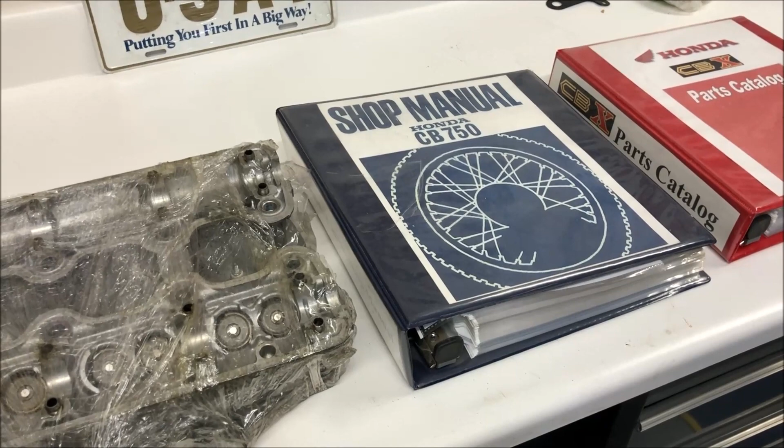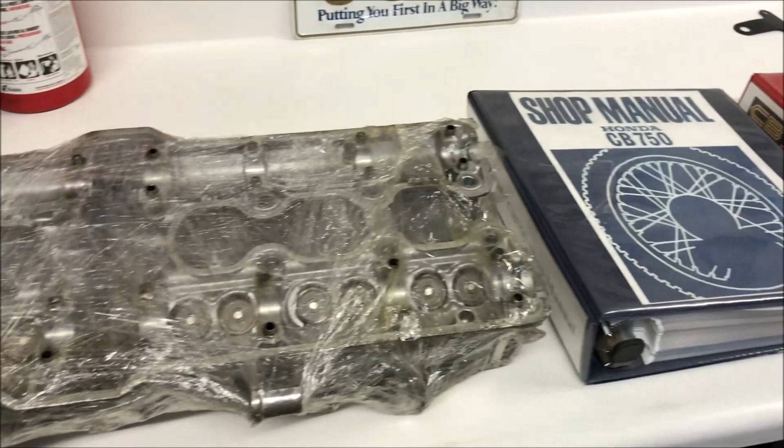And also I want to go over the CBX head that I just got back from the machine shop and unwrap that and go over it.

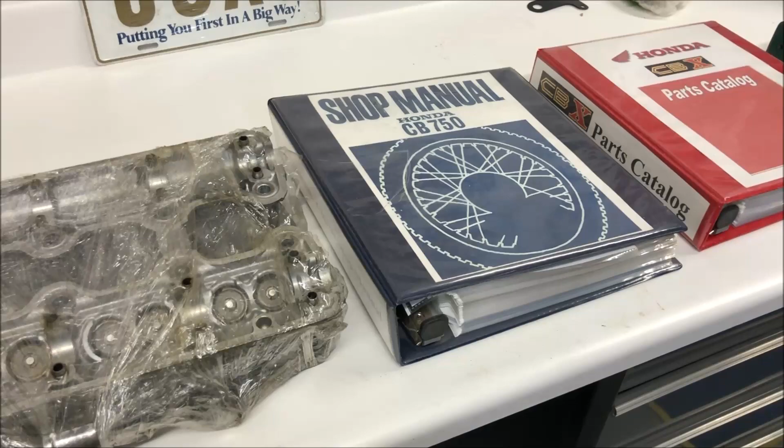By the way, somebody asked me in one of the comments where the name Digital Pizza came from, and it actually stems back to 1995. I was reading the newspaper about a website called Digital Banana, and I just thought that was very cool. And I love pizza, so I grabbed Digital Pizza. Back then, you had to have your own website if you wanted to post your own pictures for eBay, so I started posting pictures on eBay of some of the bikes I was working on. And all of a sudden it kind of stuck. So everybody over the years knows me by that name. That was 20 years ago, and it's kind of stuck. So anyway, that's where the name came from.

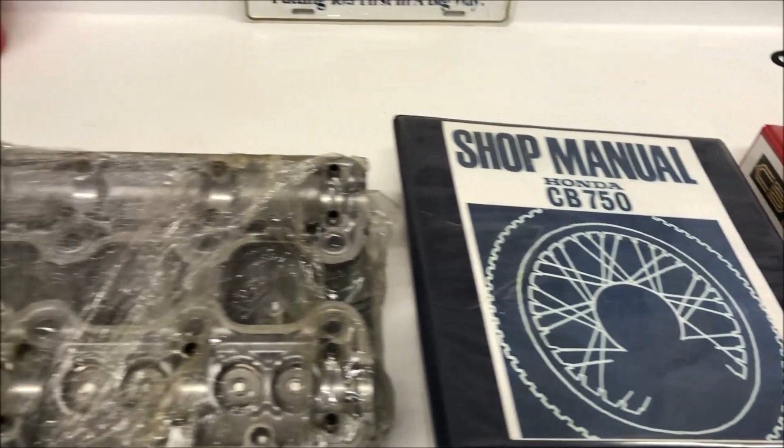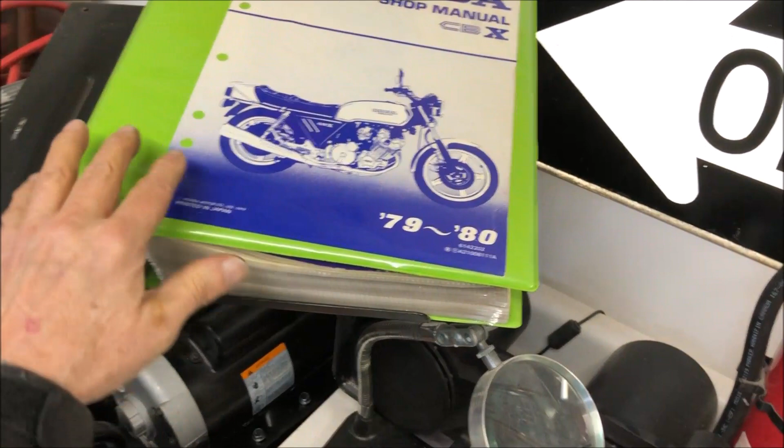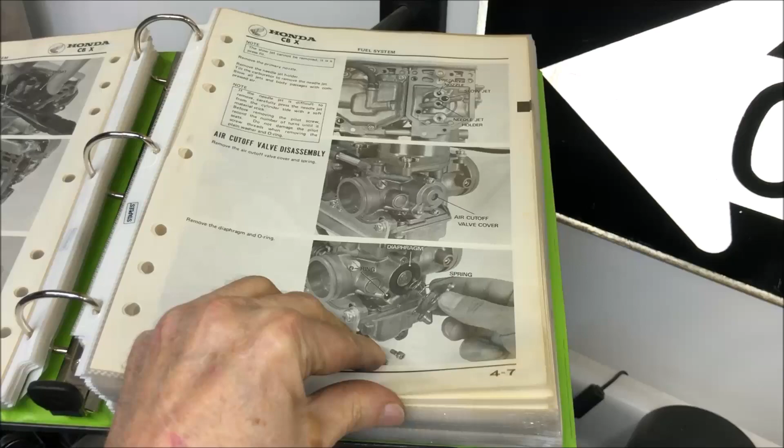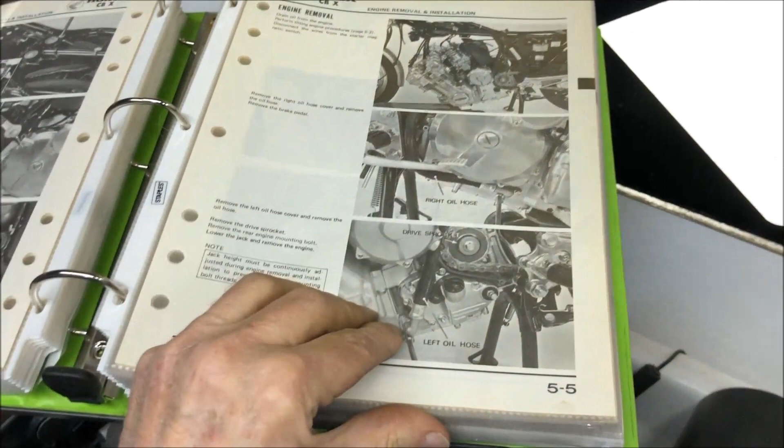As far as the shop manuals are concerned, I just think they're extremely important. On my bench here, I've even got a thing where I can have the shop manual open while I'm working on the bike. This particular one is for a CBX, and I tell you what, I refer to these constantly. These are factory shop manuals, and pretty much they cover everything on the bike, including parts diagrams, loaded with pictures on how to do certain things, just about everything about the bike.

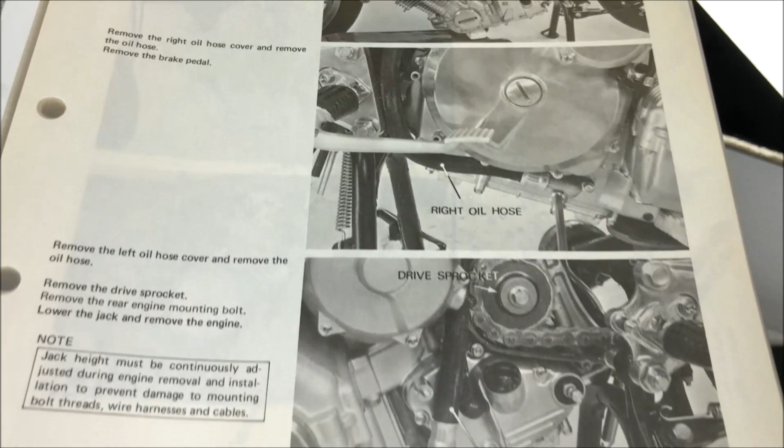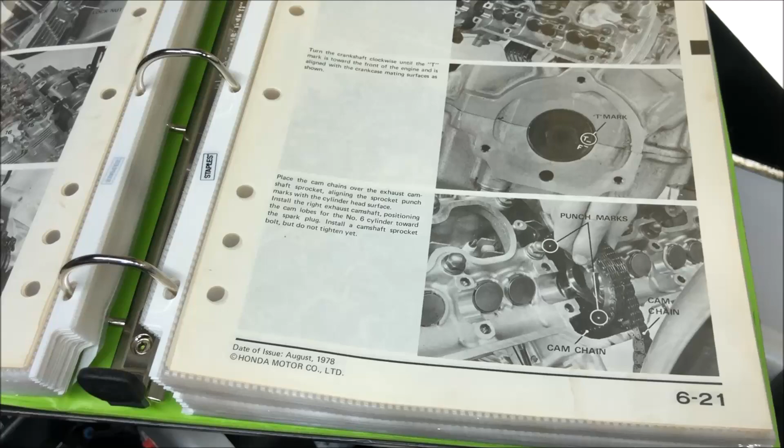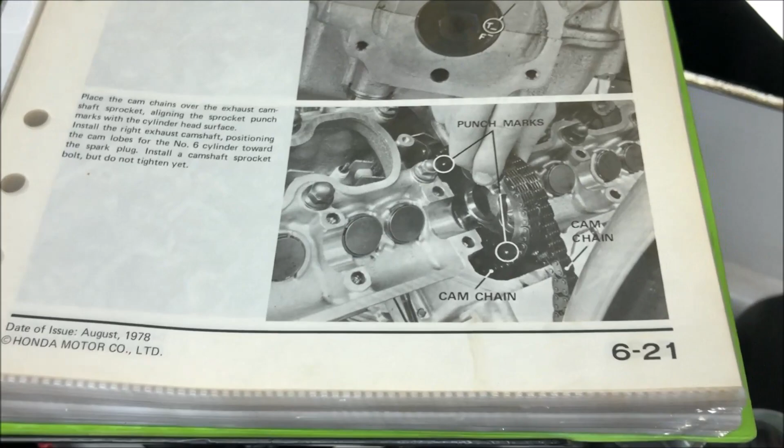These are what the mechanics used in the service department, and still do to this day. I know a lot of this is online, but there's nothing like when you're in the middle of working on a bike - you don't really want to go to your phone or an iPad and look it up online. You just have it right here at your fingertips. I've taken all the pages and put them in these protectors, so if you get any grease on it, you're not ruining the page - you can just wipe it right off.

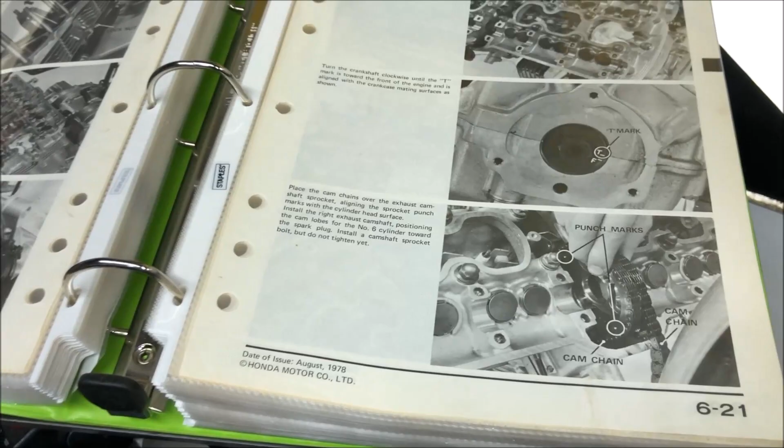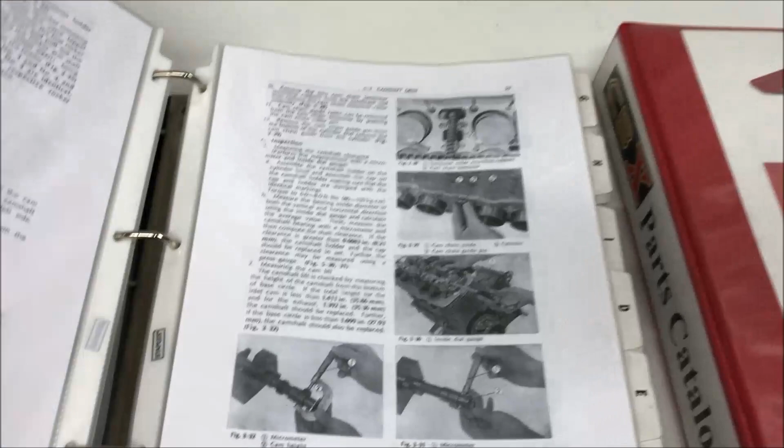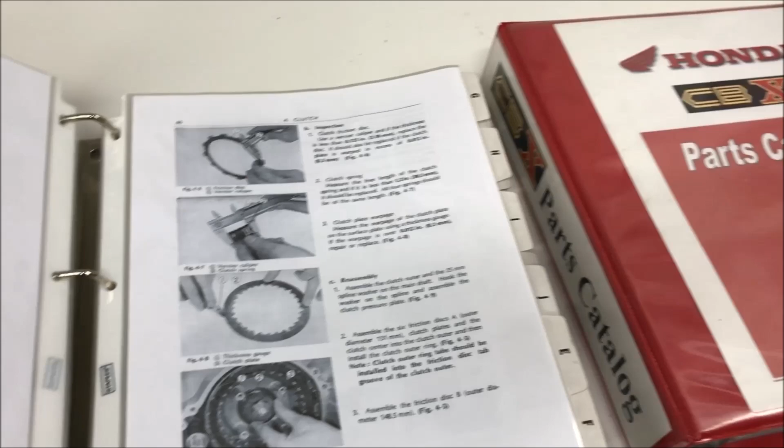So I've kind of put these catalogs together for myself, and like I said, I use them constantly. Here's one for the 750 - same thing, picture after picture, technique after technique, everything. They just cover everything. Some of these manuals can cost quite a bit, like on eBay, but they're worth their weight in gold in my opinion.

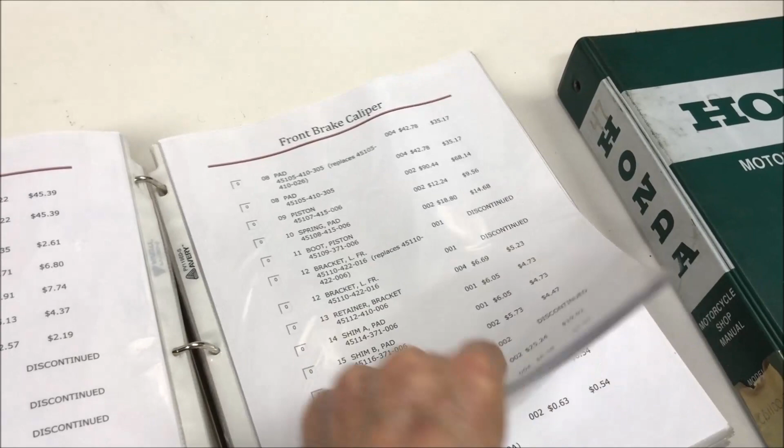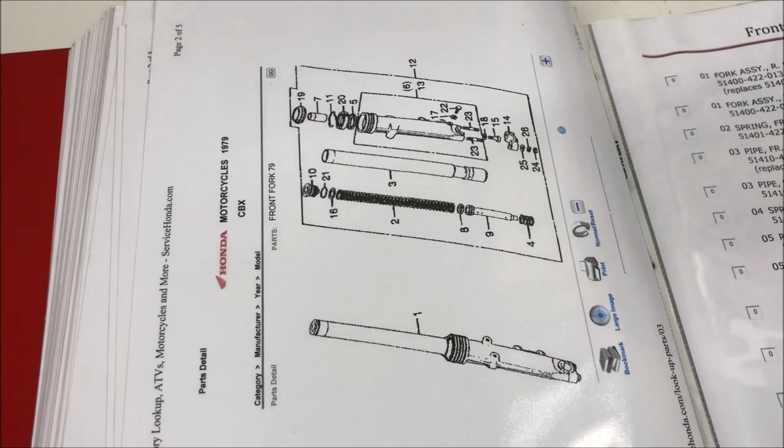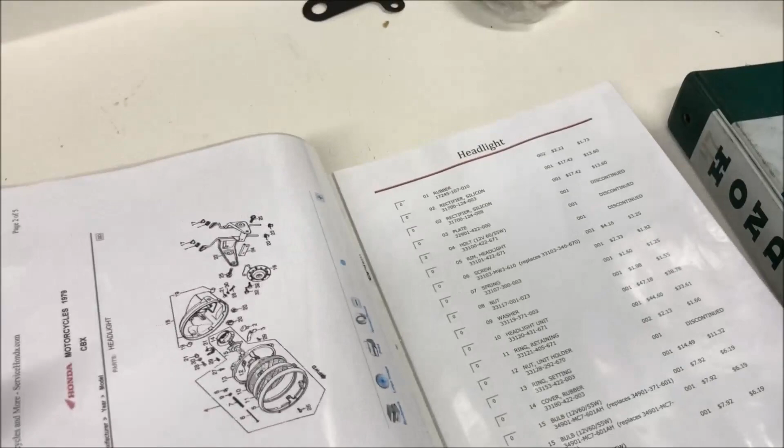A little effort putting them together in your own binder is well worth it. Then there are a lot of parts catalogs for each of the bikes. This particular one is for the CBX, and it's got all the part numbers, the microfiche diagrams with all the part numbers on there. Every time I do a job, I go through page by page and write down the part numbers. I've actually got most of those together now, and then I hand them over to the Honda dealer and find out what's still available. A lot of the nuts and bolts and everything are still available, which is nice when you're doing a full restoration - like a Concours type restoration, it's nice to have a lot of these brand new nuts and bolts. So that's on the CBX.

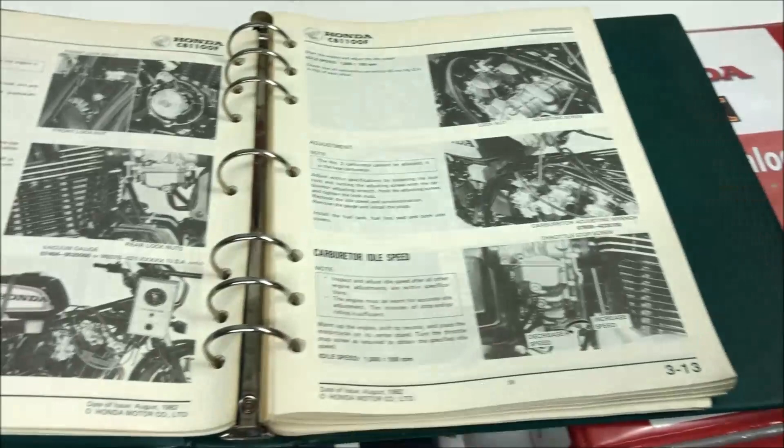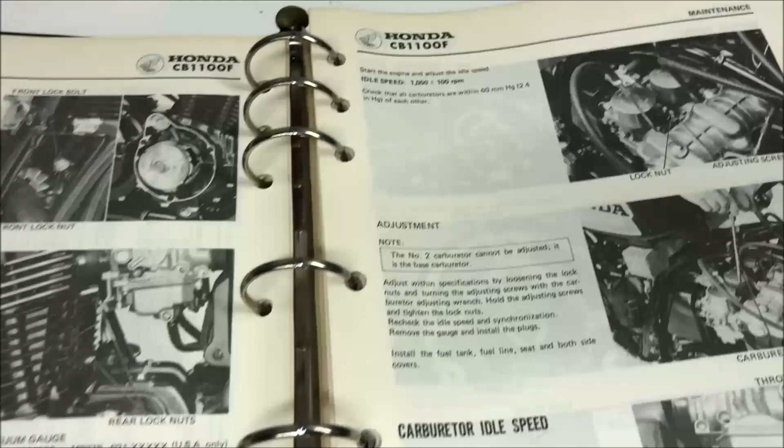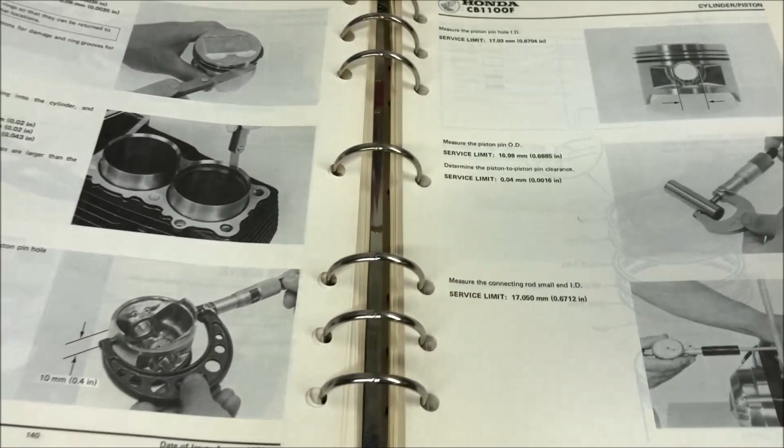And then I've also got one here on the 1100F in the original Honda binder. Again, same thing - invaluable pictures. There's carburetor synchronization information that is really useful, and it's written by the factory. Again, you can get a lot of this online, but when you're in the middle of working on it, it's handy to have it right there at your fingertips.

Okay, so the CBX head - I just got it back from the machine shop, and I have not looked at it yet, so I'll unwrap it here. All the valves have been reground and reconditioned, with new valve seals.

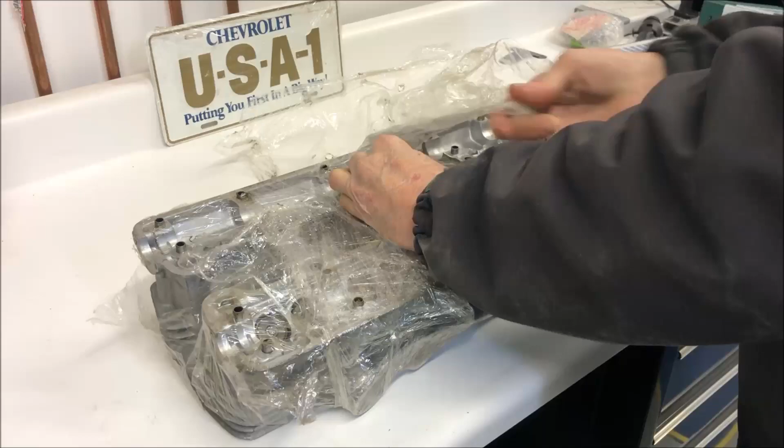It's been cleaned up and ready to go. I think there's even a couple of new valves here. Maybe not. Anyway, like I said, they've all been reconditioned. Not sure if he surfaced the head or not, sometimes it's good to do that. But anyway, it's just basically cleaned up. And what I'll do is I'll wire brush all of this aluminum to make it look like new again.

And then when I put it back on the engine, when I paint the engine, I just kind of fog over with the silver to brighten it up a little bit. I don't put it on heavy, and I use engine paint, just regular engine paint from any of the paint manufacturers works great that you buy at the auto parts store. But it sure makes them look nice.

Again, all the cam bearings are all nice and reconditioned, ready to put the cam in. And that's it. That's what the head looks like when it's all done and ready to go.

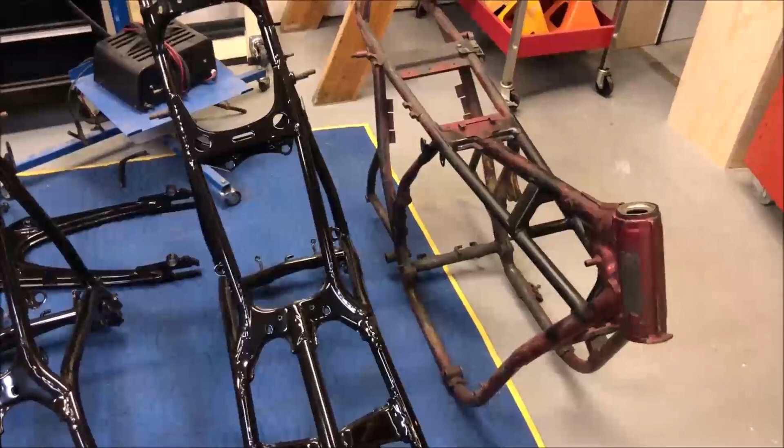So this week I'm going to be taking this frame to the powder coaters, and I will have a video on the powder coating company that I take it to. Hopefully they're going to let me show you the powder coating process and the big giant oven that they put them in after they've coated them so that it all looks beautiful like that.

And also in my next video, I'm probably going to go over the VIN tag, the installation of it. Like this frame right here, this is the VIN tag for this frame here.

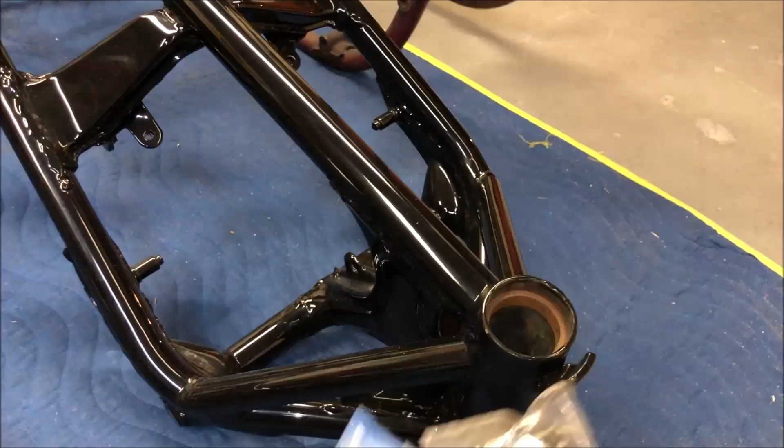So I've got the tag there, and I'm going to go over the little brads that hold it in place. They're actually not riveted on, they're held in with little brads, like small tiny nails so to speak. I don't know if I have... oh yeah, I've got them in here. It's basically just a tiny little nail that's knurled, it's got a knurled edge on it. And I've actually got brand new ones.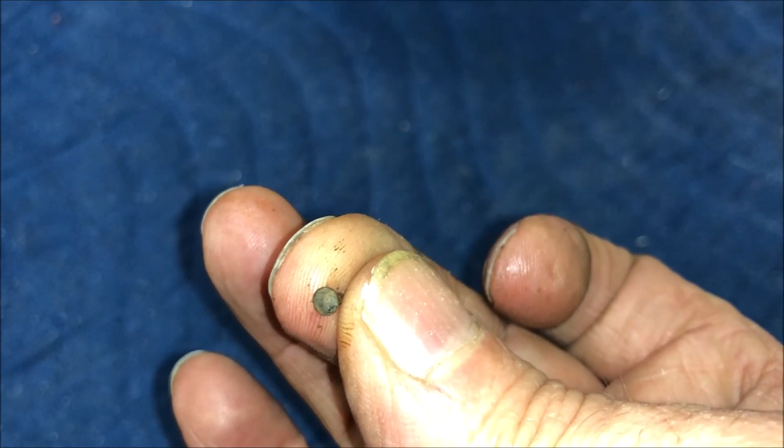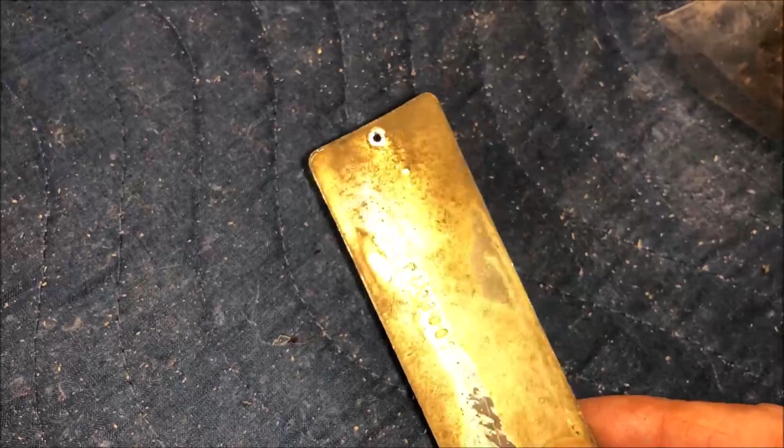That's all they are, and they just go through the holes there and hold that VIN tag in. It's a very easy process of installing and taking this out, but it's a little tricky and you have to be very, very patient, because these VIN tags are so thin and so brittle, and they have a little bit of glue on the back, so you kind of have to use a really thin razor blade. You almost have to bend the razor blade, and it's kind of a process, but if you're careful, you can do it without ripping the holes.

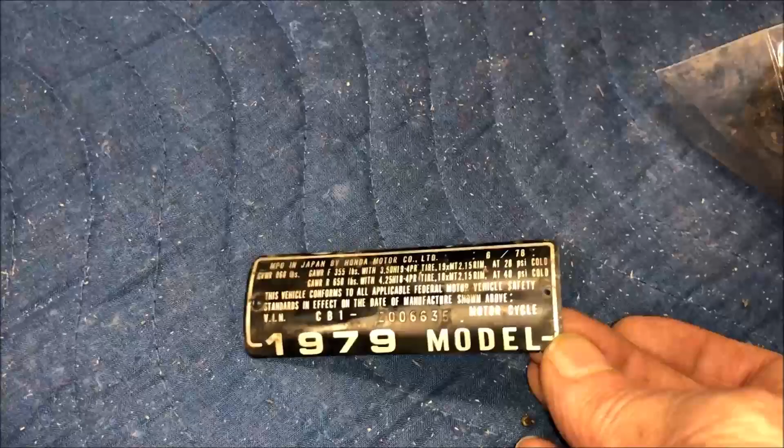As you can see, I was pretty successful at getting these off without messing up the holes. So anyway, on the next video, I'm probably going to show you how this VIN tag goes back on the neck, and that'll be helpful.

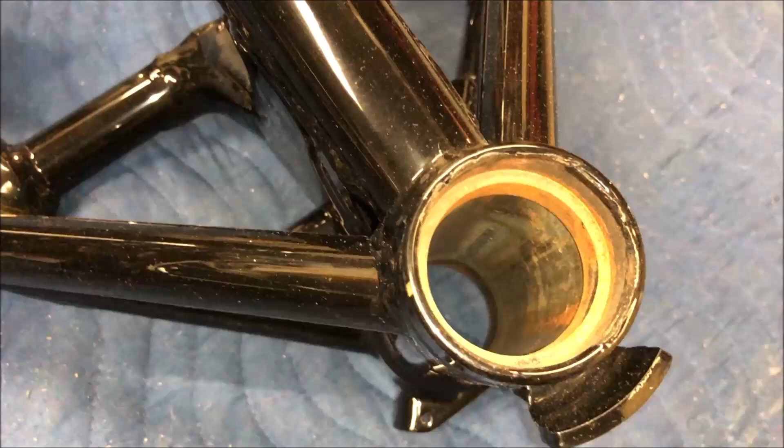The CBX is pretty easy because inside the neck you can actually see the backside of the little brad sticking out of the holes, and all you have to do is get some kind of a tool in here and knock them out, or push them out to the point where you can grab a hold of them with your fingernails and just pull them right out of there. Pretty easy on CBXs and the F bikes, 1100F, 900F, and so on. They're pretty easy to get out of there.

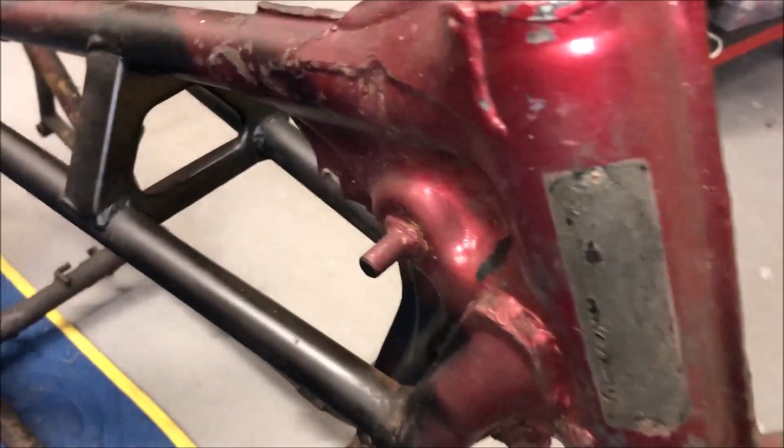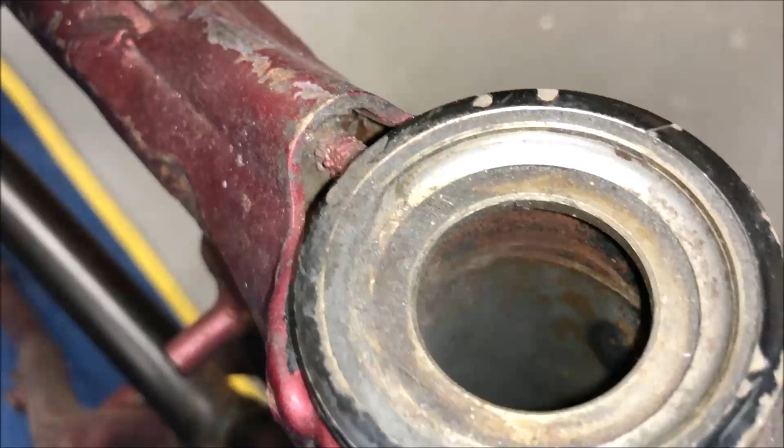But unfortunately, on the 750, it's a much more difficult process, because see there's the hole right there for the brads. They use this exact same brads on this as they do on the CBX. But the problem is on the 750, they have a double wall construction inside there, so you cannot access the backside of the brad like you can on the CBX. So this is a double wall construction on the neck.

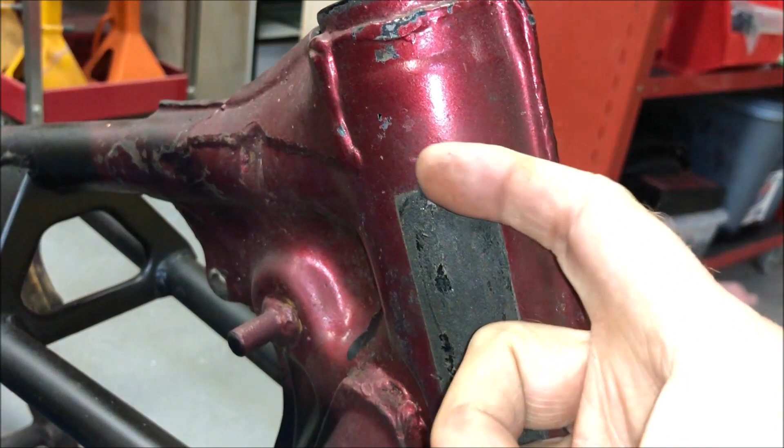So basically what you have to do, I'll show you on another frame, but what I do is I get a razor blade and I stick it behind the brad and I work it all the way around, and I try to work it out until it gets to the point where you can grab it with a pair of pliers or whatever and pull it out of there.

And again, I found a place in Europe that sells brand new brads, so I'll give you the link on that when we go over the VIN tags. That'll be on the next video here in the next couple of days, so watch out for that.

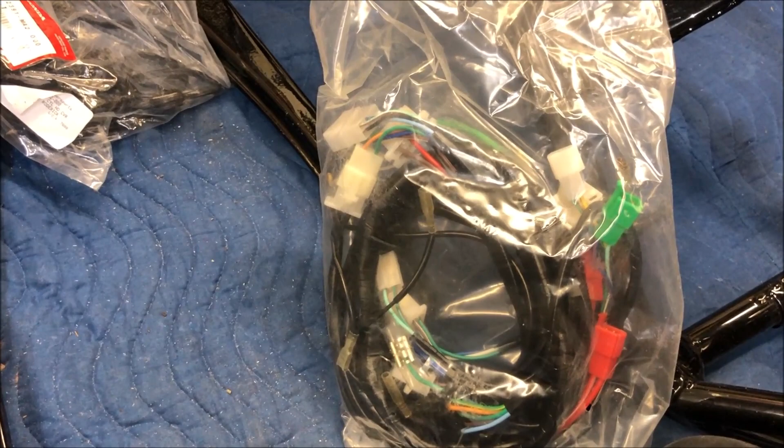Another thing I'm going to be going over during this restoration is the wire harness. My philosophy is that I will not restore a bike, a ground-up frame-off restoration, without putting a brand new wire harness on the bike. You get the frames looking like this, where they're literally like factory new, and you put an old, crusty, ugly wire harness on it, it just doesn't match. They just don't fit. In my opinion, a brand new wire harness looks fantastic on a nice brand new frame.

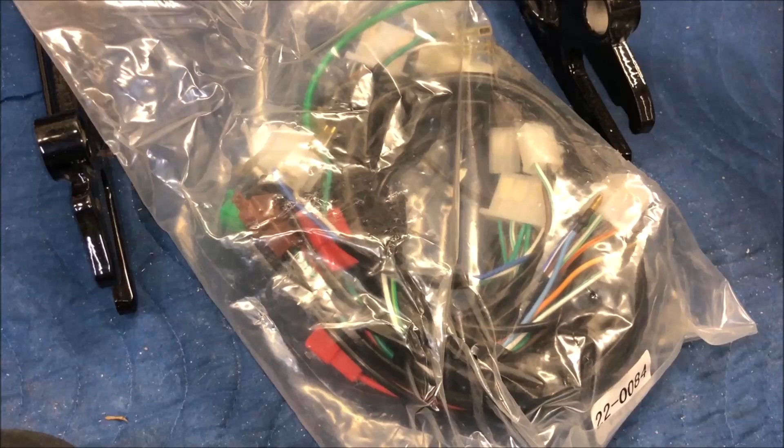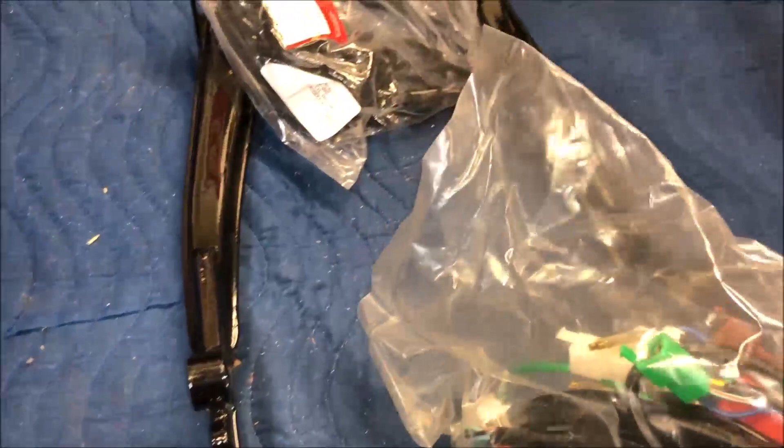That's just me. Some of the wire harnesses are still available. The CBX wire harness was available until just recently, a couple years ago, but now there's reproduction wire harnesses that are pretty damn close. I believe this is a reproduction one right here, but it is identical to the one from the factory. The only problem is that some of the other harnesses that go on the bike, such as the alternator harness and a couple others like to the coils, if you make the main harness NOS or brand new, you really need brand new ones of those too, because when they connect together under the side cover, you really want all of these connector heads to match as far as the color is concerned.

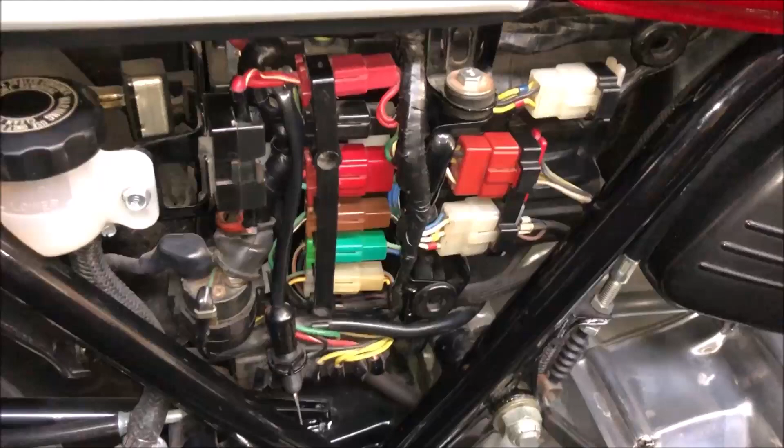This is what I'm talking about here. This is my CBX that's already restored that I showed you earlier. As you can see, all the wire harness connections match as far as their color is concerned, because I replaced everything, all the harnesses, with new ones. These are a little bit on the dirty side because this bike has been sitting for a few months and I haven't really cleaned it, but you can get what I'm talking about.

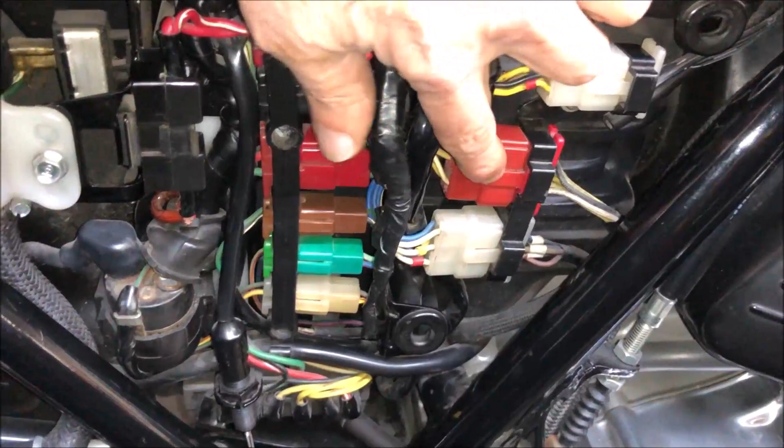All the colors matched, so you want this red to match this red back here. If you don't, this red may be all old and faded, and then you have a brand new one connecting to it, and it just doesn't look good. Especially the whites, the white's always yellow, like this one right here is even yellowing now, because this bike was restored probably 2 or 3 years ago. So anyway, you get the picture on that.

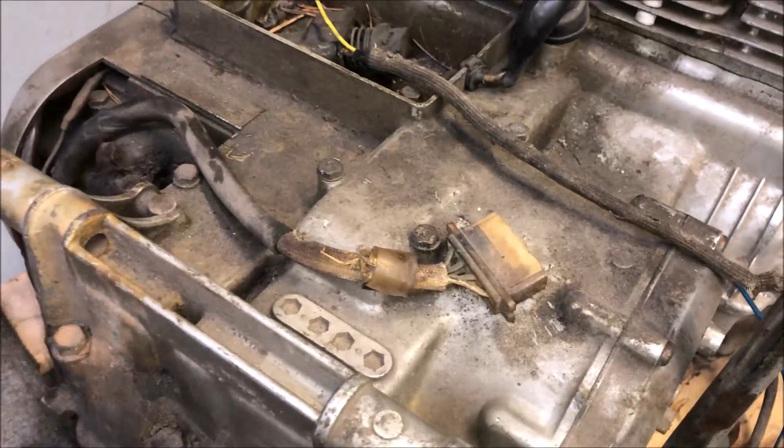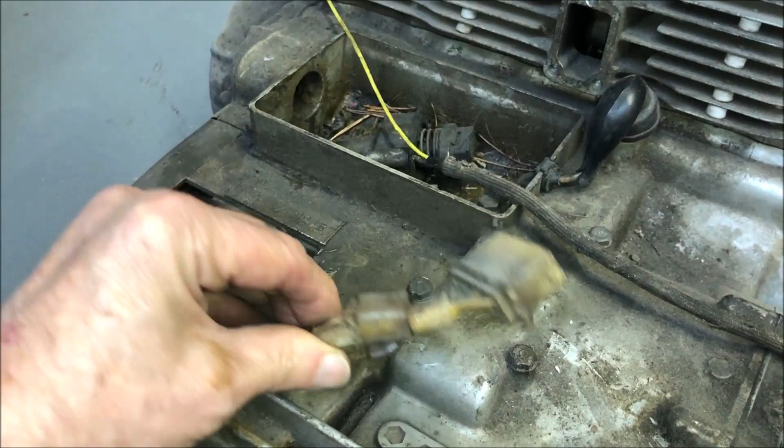Here's another example of what I'm talking about. This right here is my 1969 750 that I'm going to be restoring, and there is the alternator harness. So let's say you have a brand new NOS harness, which I do for this bike, and then I go and connect this up to it. You tell me what it would look like. So anyway, you get the picture.